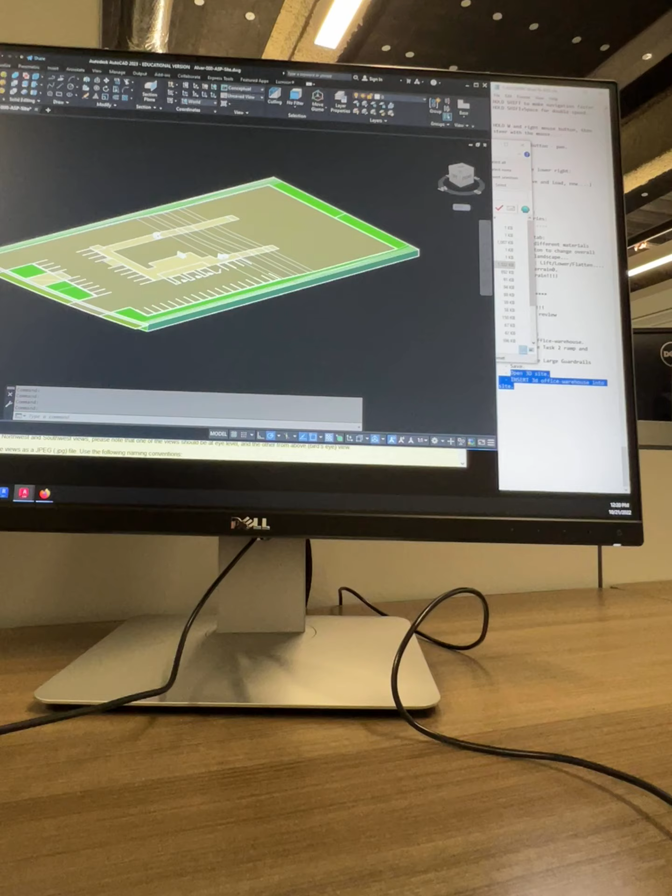You ready? Let's do this. Step one, I have a question.

For task 2, for the ramps, when we start doing the ramps, as I remember, you moved it like 45 back. Yes. But for yours now, you are showing we didn't do it 45. Is it showing that we did 45 or not? Watch out, the sides were 90, not 45. I mean, yes, I did 90, but for like, I moved it and 45.

Why would you move it in another 45? It's just, you inserted it. That's what we did first class. Careful.

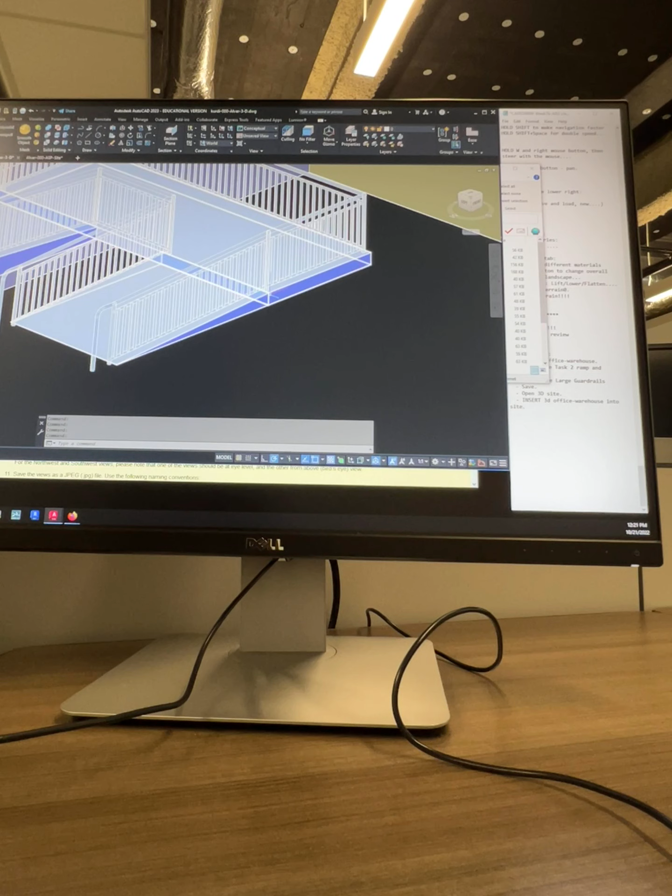Let me open it. Open with Acrobat Reader. Give it a second, I'll show you right now.

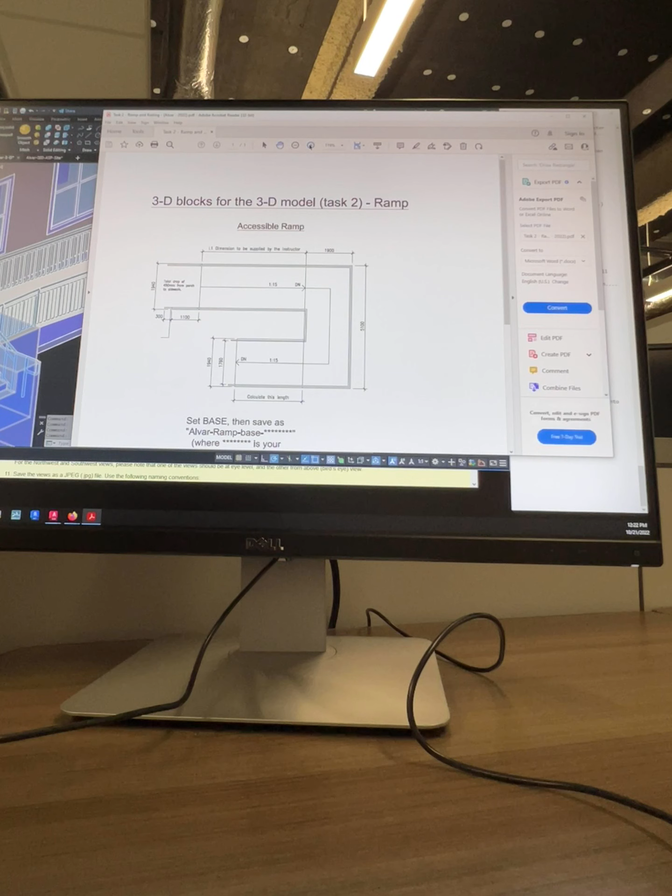So this was here, 90. It was mandatory, you must make it 90 because of the way they build the sloped ramp, right? So this here, from the edge of the concrete to the center of this railing is 90. This is 90, it says so right there. This number minus that number divided by 2. This minus that is 180, half of it is 90 millimeter there and 90 millimeter there.

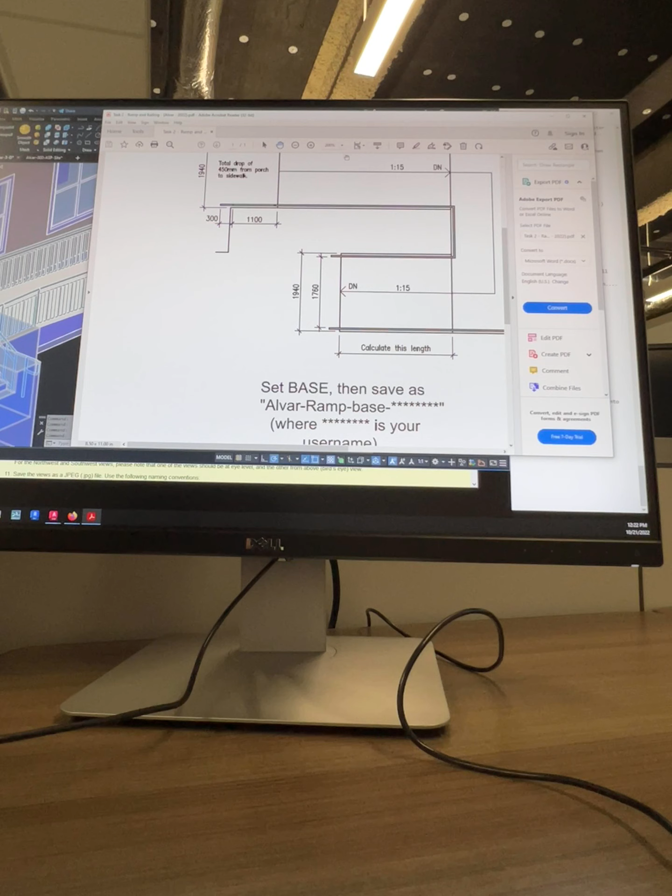All the other measurements we made 45. We made this one go forward 45 and back 45. But this one, we made it plus 90 longer and plus 90 longer. That's what we did. This one we made 90 back and 90 back from the edge. So the vertical ones were plus minus 90 because this had to be built like that. You have to, because there's a corner edge here that is not shown on the drawing.

If you go back and look at the Mississauga FADS or any of the other ones, right, you'll see this. Here it's Firefox, let's go and look for Mississauga FADS from it. Here it is, Mississauga FADS. There's another replica, we're there. You can open the HTML version or the PDF. I'm going to open the HTML version.

So here's the web version. And if you go down and look, right here, you can go down and find it. It's somewhere under railings, I missed it. So somewhere here, ramps, there it is. Ramps, and if you go down here and look at this, right? And you look at the ramp image, you need to have it away from the edge by 90 because of the way it's built, right? You can see right here, this middle one. Look at the middle one, right here, the section. So this goes up, across, and down, and you have to make it 75.

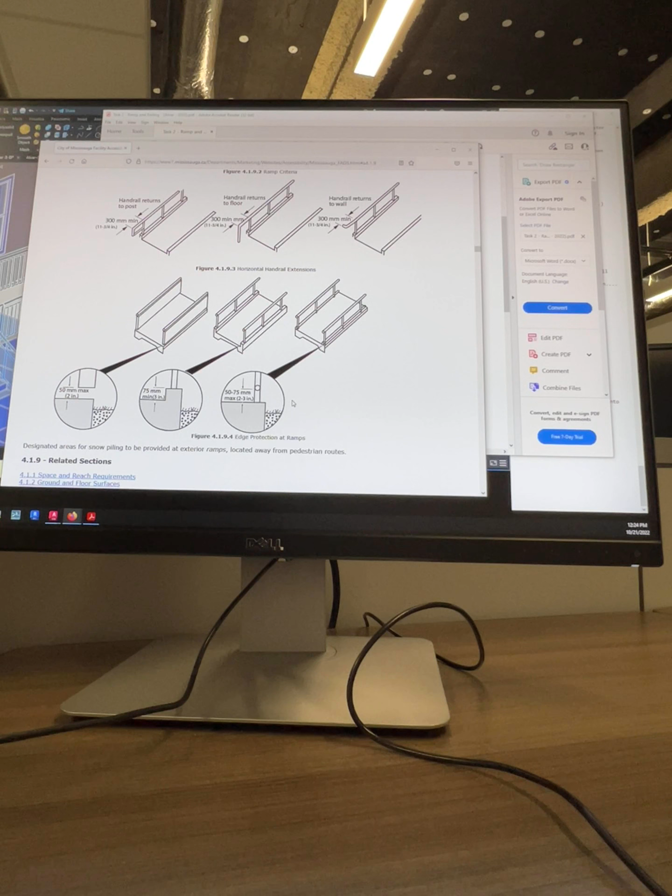But we didn't do this, we made it flat. If you're making it flat, then it can be between 50 and 75. We made it 60 up. But it has to go in from the edge 90 from that edge. That's basically how it works. For construction, you need to do that. And this is what we got.

If you did it differently, well, either you hand it in today since it's due, or you fix it and hand it in later. But basically, this is what we have. Okay, let's continue.

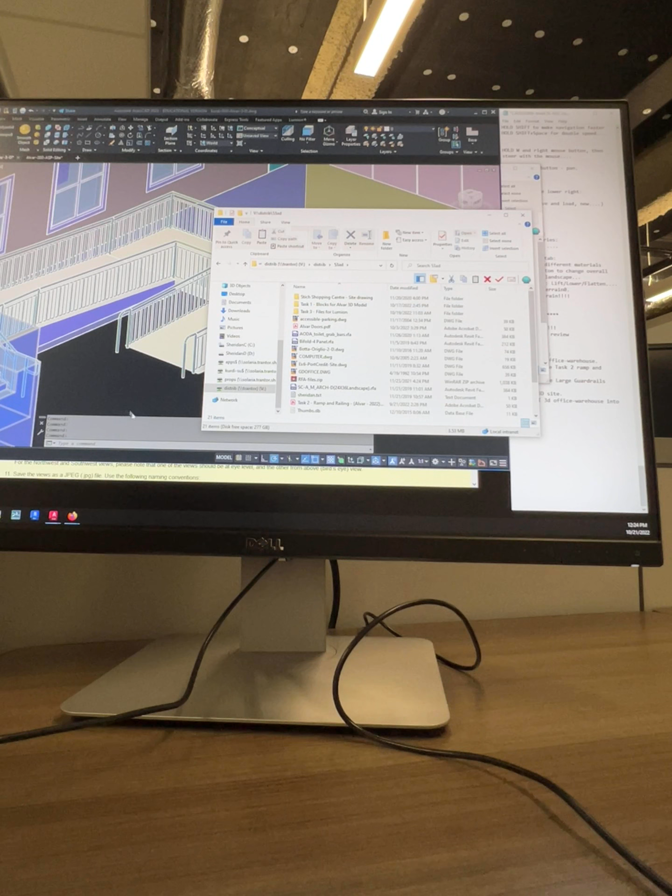I got the blocks, I got everything done here. It looks fantastic. And now let's insert this building into the site plan. So one final time, the final time ever, I'm going to save it. And I have some good news for you.

Stop. If you didn't finish your model, you're missing windows, you're missing these doors, or you're missing something, don't worry, continue working on it today in Lumion. You know why? You can actually update it in Lumion. So you go back, change the AutoCAD model, and update the Lumion version. Change the AutoCAD model again, update the Lumion version.

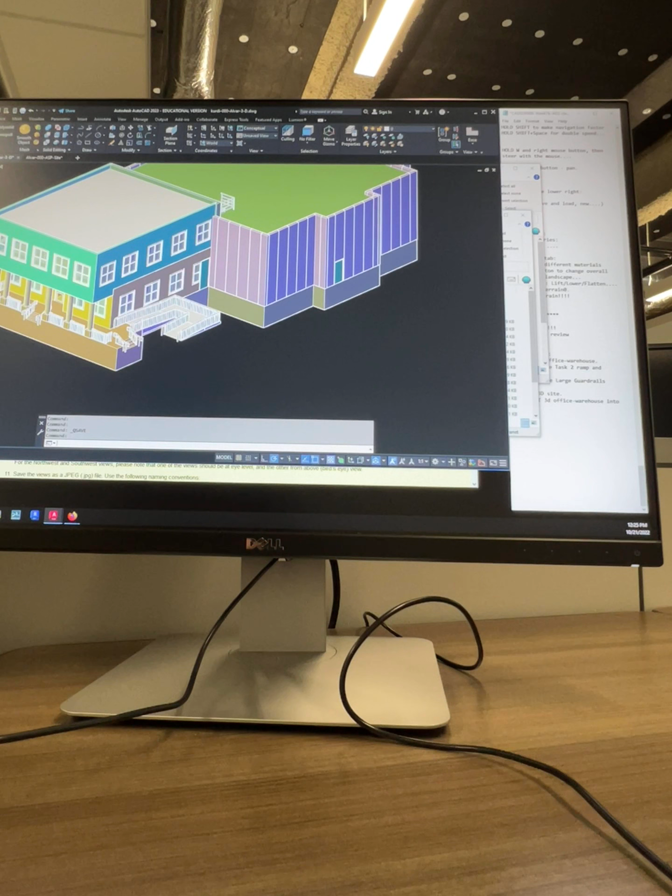They did this because they were tired of people saying, oh, I made a mistake but I'm not going to fix it because it's too much hassle to start all over again, right? So Lumion now has a way, they've been doing it for almost 8 years, to update the model easily. I'll show you. So even if you don't have a completed model, even if you don't have assignment 2's ramp done, doesn't matter, take the building and let's continue. Are you ready? I'll save it one final time and close it. I'm done with it, no more 3D model.

I'm going to insert it in here now. Watch, right here, let's insert the big building. You should do the same, even if it's not finished, please. Let's move on, let's continue working.

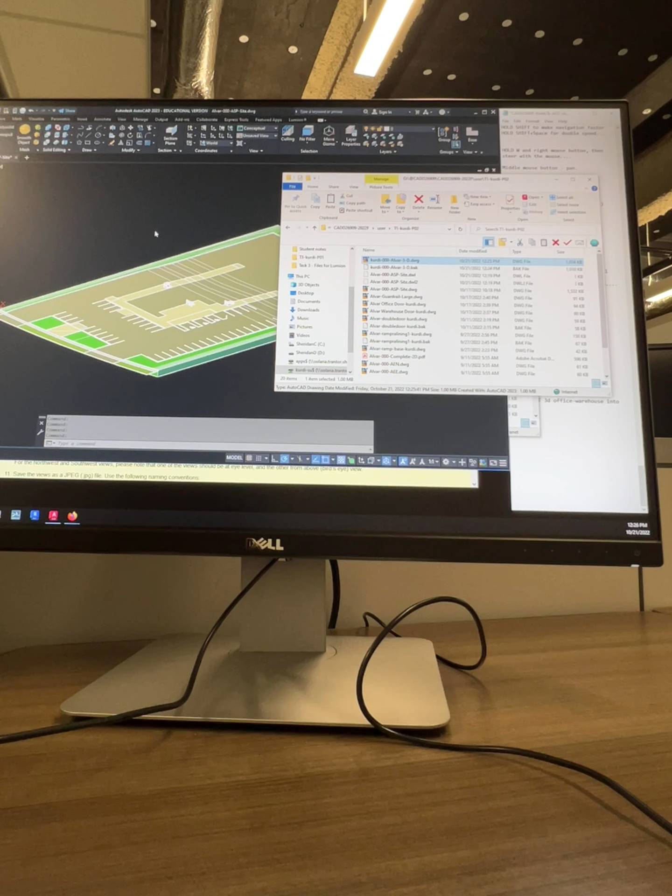So, user, assignment 1, PO2. Right here, there's my 3D building. Drag and drop, drop it in. Insert, it'll take a while, it's big. There, I got it. Drop it down in the back.

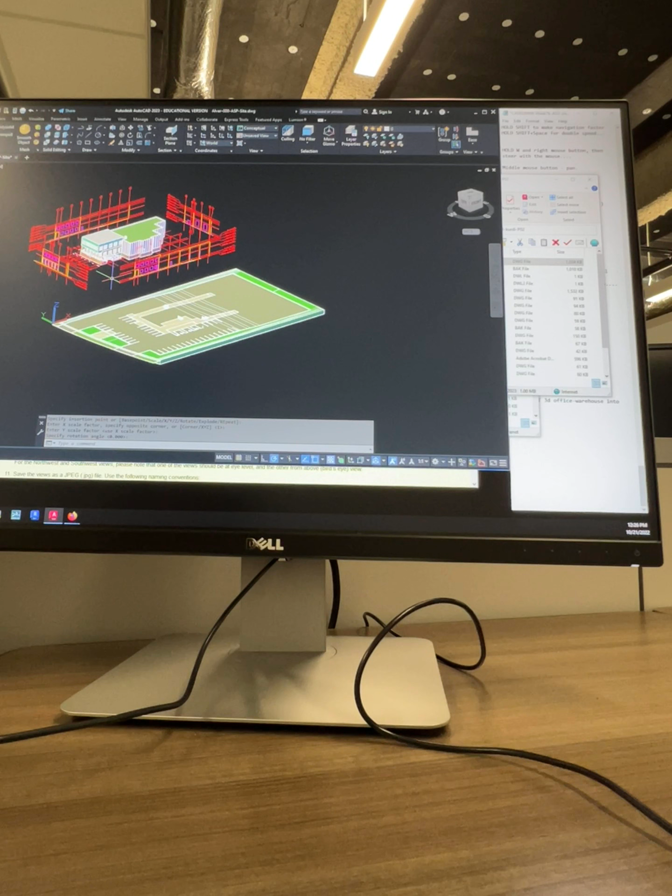Somewhere there, it looks beautiful with everything, all the extras and everything. Scale, enter, Y scale, enter, rotation, enter. And we got it inserted, right? We got the model. So please continue inserting it into your site even if it's not finished. You will have time this week, because it's reading week, to finish it if you don't have it completely done.

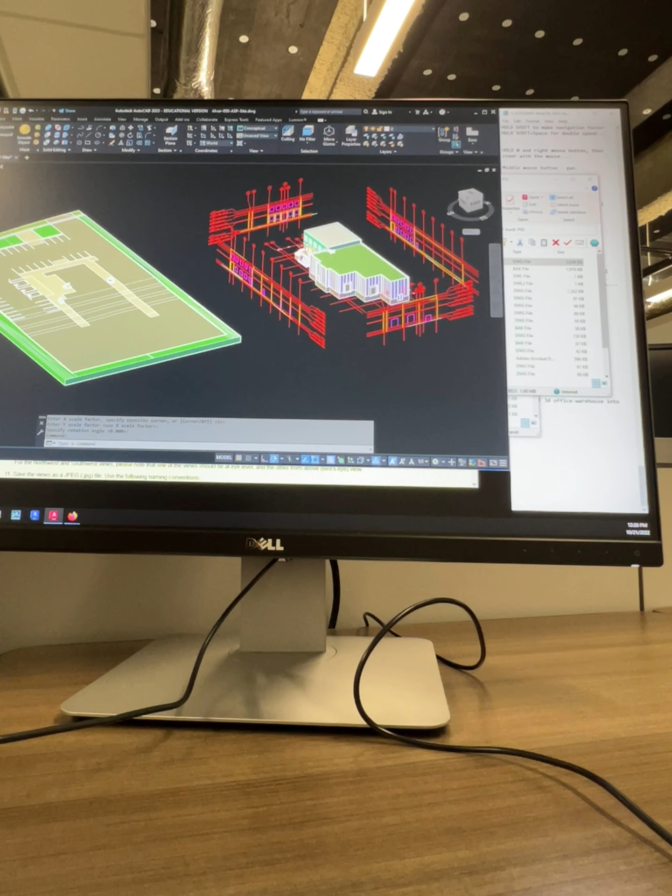Right, now I'm going to cheat a little bit. Watch, I'm going to change one thing. Don't do this, in fact I think you already have it. On some of your sites there's a mistake. We made a mistake when we were stretching them, because the outside measurements are the same for everybody, right?

So if you look, okay, I have to be careful, these machines are not as fast as the one in B432. So the width of this is the same for everybody. The edge, the curved edge, is the same for everybody, right? The back of it here is the same.

The only difference is the middle part. This middle part is all different. Why? Because everybody has a slightly different building. So we have to stretch and adjust and fix and so on. It took forever to do. We made 280 copies of it, or at least I did. I made 280 copies of this model.

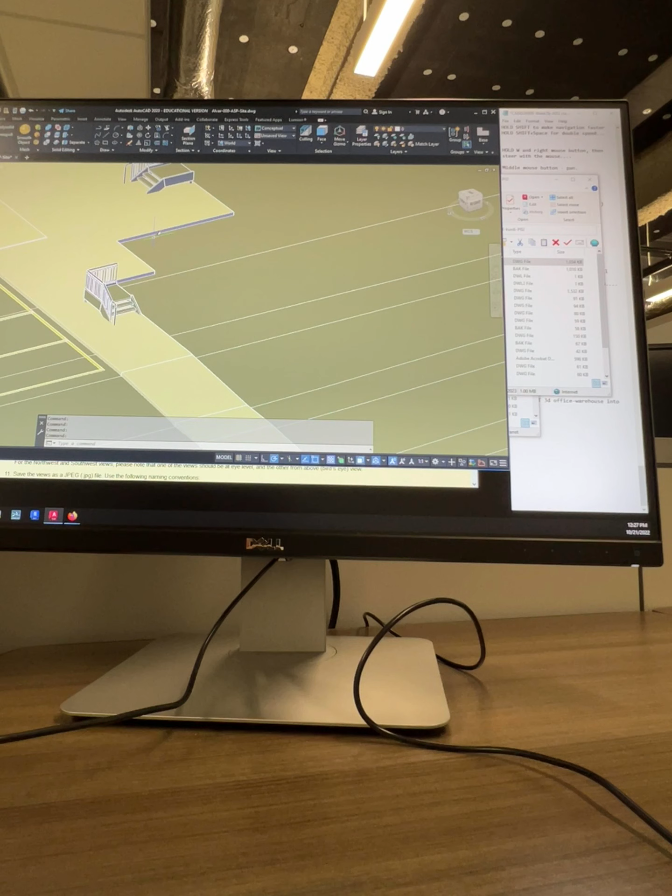And watch, I'm going to deliberately make a mistake now. Don't do this, just watch. I'm going to move this face back 300, like that. So deliberately I'm making a little mistake in the model.

Don't do that, I already have it done on many of your models. On many of the site plans I already did that. There's a mistake, so I made a mistake on some of the site plans. Guess what? After looking at it, I said, oh, that's perfect. Let's load in the model with a mistake, and then I'll show the class how to fix a model in Lumion.

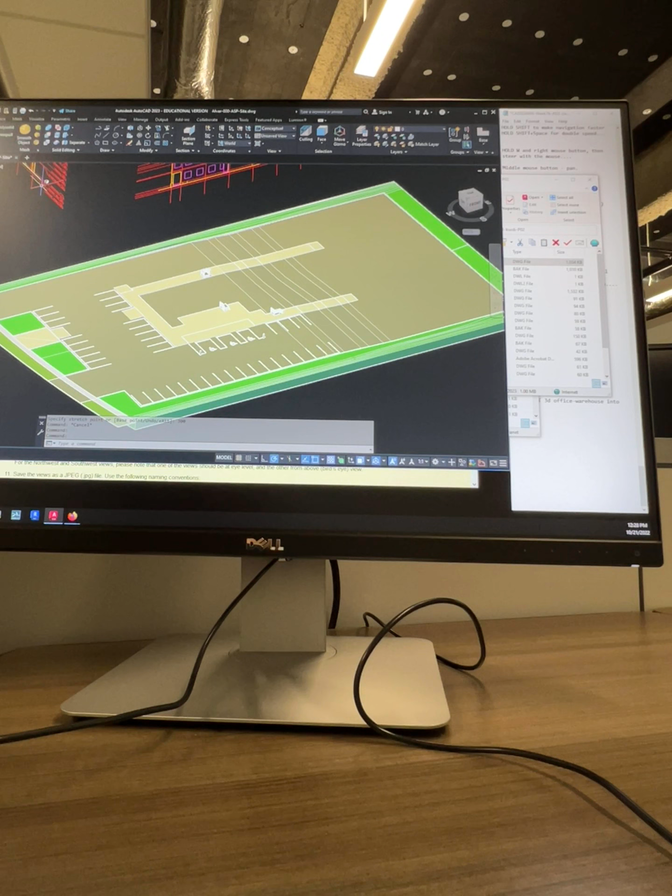Okay, so I was so happy that I made a mistake, because I can teach something else, teach something new. So watch the screen. I got it done, and most of you have this mistake. There's a little tiny sidewalk piece missing here in the corner. You will see it in a minute.

Now, how do you put the building in? Easy. One, can you please freeze and turn off all the extras? Layers, let's do it. So go to layers. Take the extra, no need to freeze them one by one. No, click here, freeze the whole extra group, all of it. Visibility, frozen. They should disappear in a minute.

They're gone. Now do it again. Visibility, turn them off. So I'm freezing them and turning all the extras off, just to make sure 100% they won't be visible. I don't want them ever visible. So go to Xref and just click on the Xref category and just freeze from there, easily.

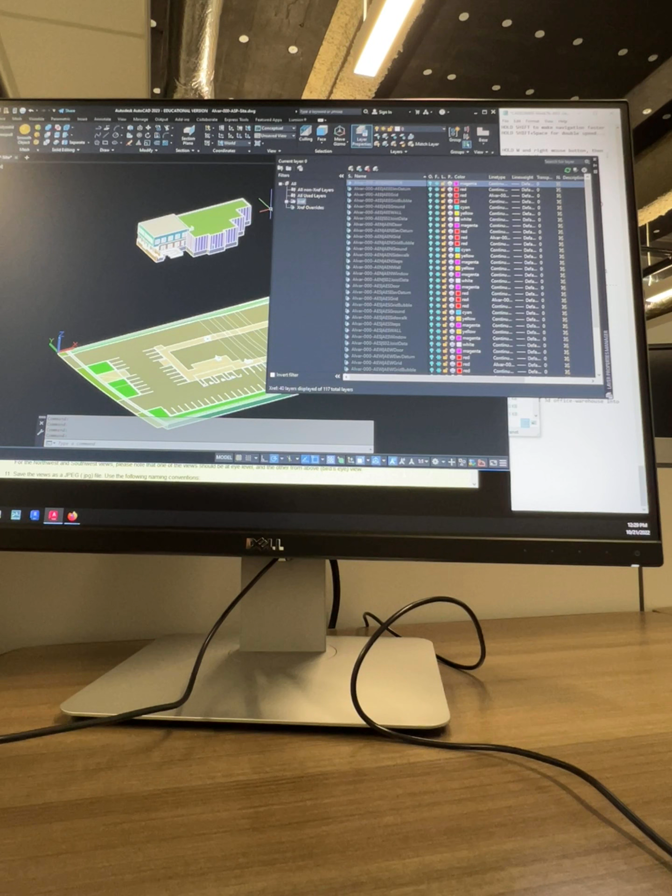All the extras in one shot, right? Visibility frozen and visibility off, like this. The Xref group, this one, visibility off and frozen. The rest of the model is just fine. Look at it, it looks beautiful. Now, let's move it in place.

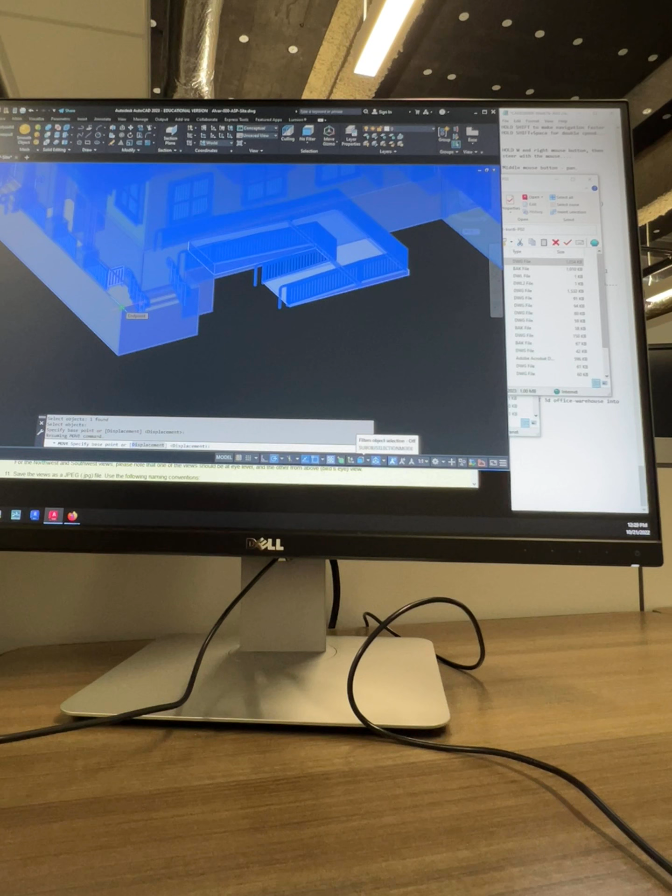And we got a problem, watch the screen. I'm gonna move it now, watch, move. Move this big block, enter, from the front, here, the front corner of the walkway, there, the front corner, there where I'm pointing, see it? Click, move it from there, and we're gonna put it on the site plan, at this corner here, the front corner of the front, like that, click.

That's step number one. So move it in, put it at that corner, that one here, the bottom corner right there, at the corner of the sidewalk, right? I don't want the explorer, no need.

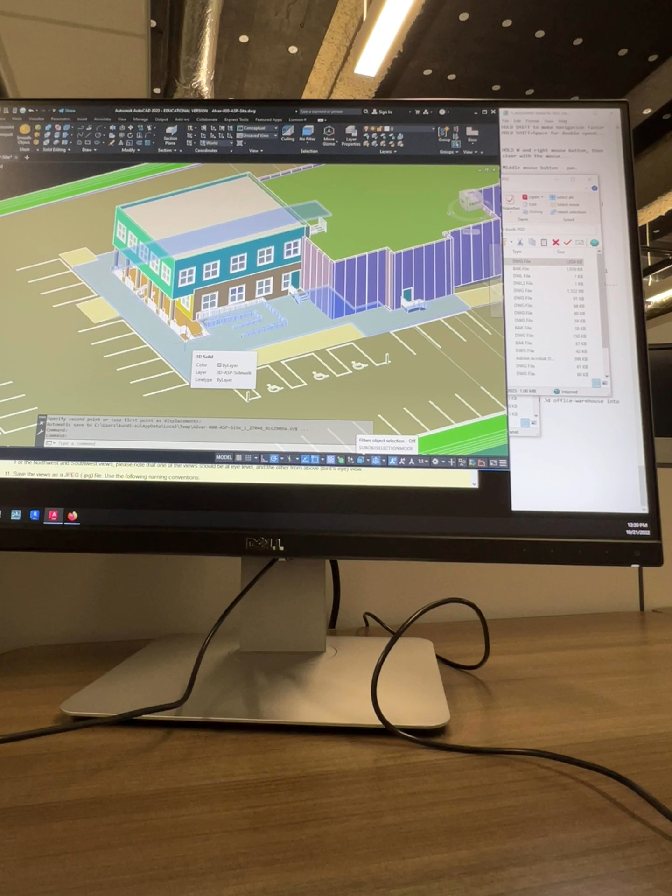Okay, can you turn them off by hand? Like this, go to layers, and go to all layers, and you'll see the xrefs in gray. It should show up in gray, like this. Select them and freeze all of them. Click on the first one, shift to the last one, and then freeze them.

Okay, sorry. That's weird. If you don't have an xref, that's odd. You should have an xref. There should be there an xref, always.

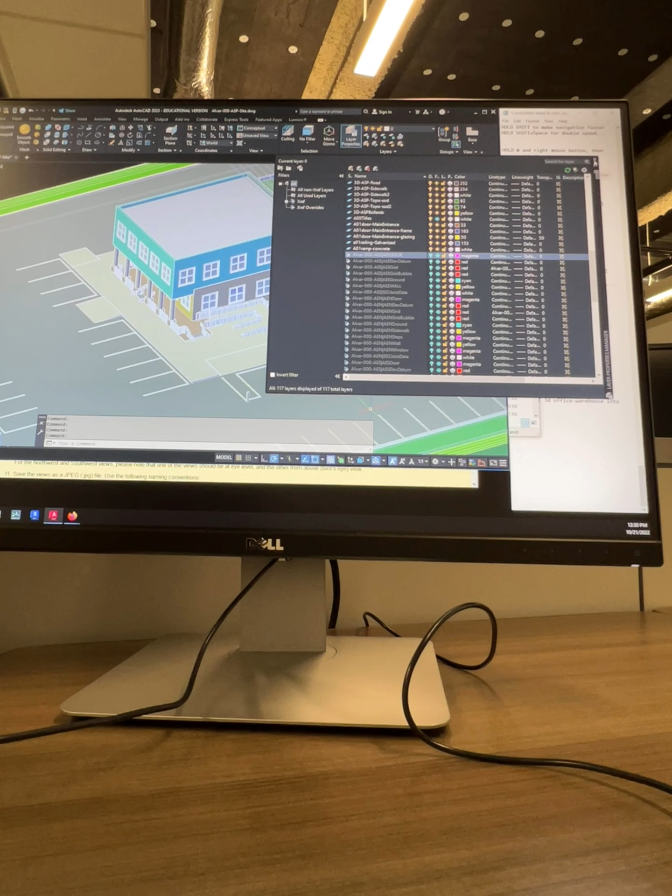Okay, let's continue then. Did you put the building here in front, right there? Well, the location is correct, but the height is wrong. Check it out. You see how the railing's going underneath the ground? That's not good, right? So we moved it, we put it in place, but the height is wrong.

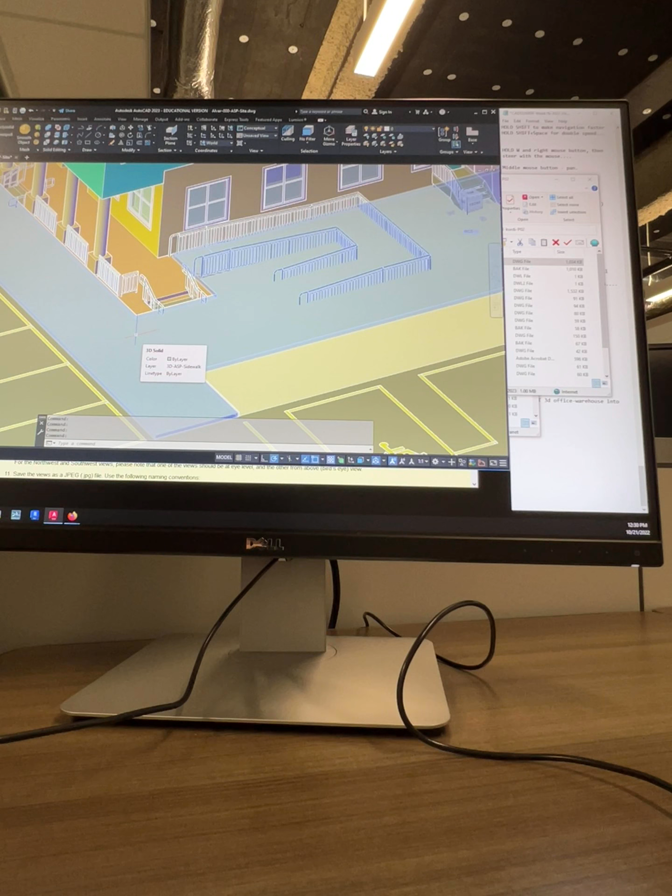So grab the corner there, put it here, and then move the building up 450. Everybody, grab the building, move it up in the air 450 like this. Move the building up, straight up plus Z, 450.

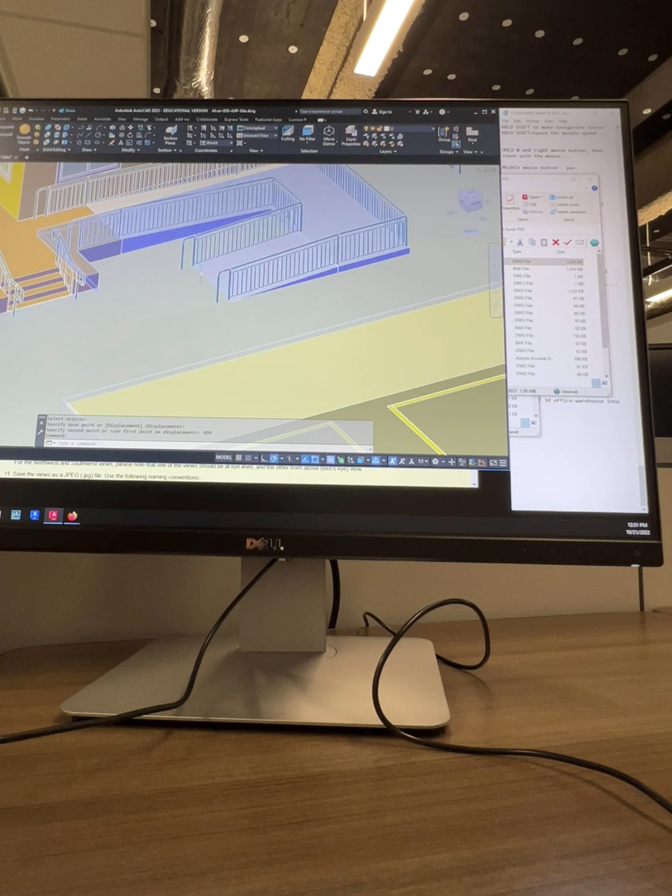If you zoom in on it, it looks perfect. You can see the ramp stopping exactly there at the edge. You can see the stairs. The first step is flush with the sidewalk. Perfect, I love this. So we got it done. This is what we wanted. The building looks perfect, right?

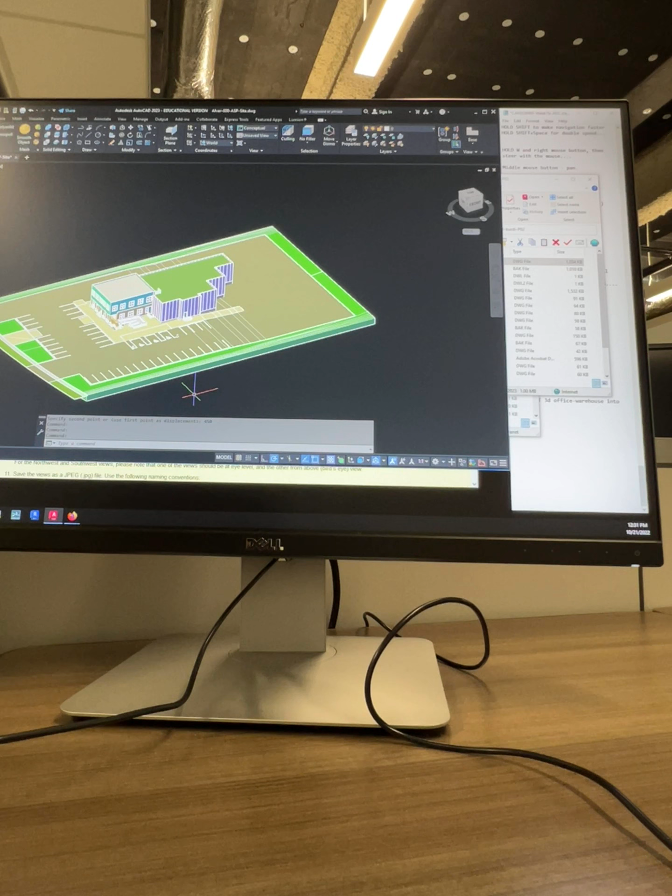Anything else you have to fix? Yes, question: the ramp on the exit door for the office is on the window, like touching the window. That's okay, that's okay, it's a good question. The door and the office are overlapping. The door and the window and the corner are overlapping. Not really, they're not really overlapping.

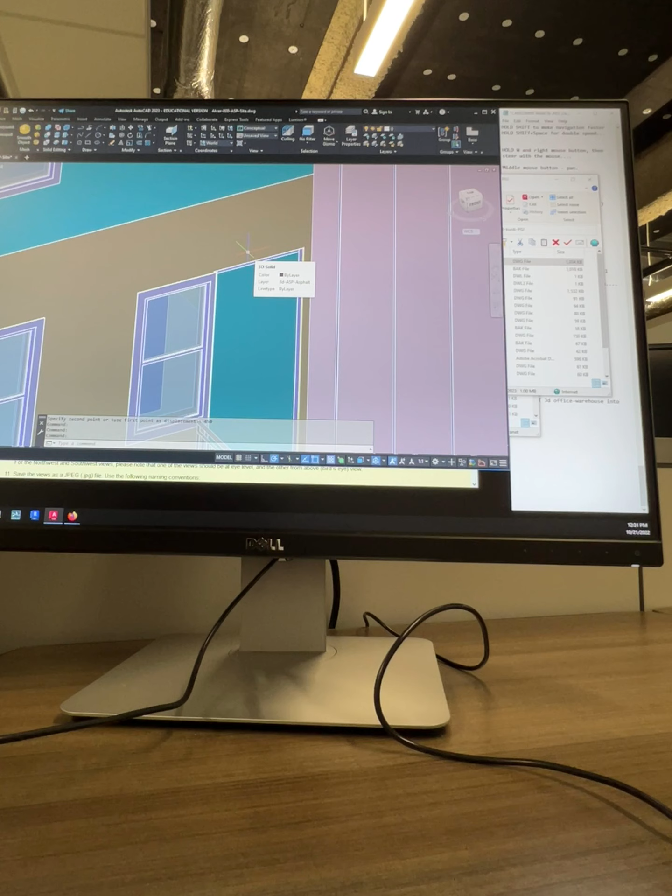If you look at it carefully, look at it, only the frame is overlapping. So you put the window in, and then when you add the wooden frame around, or a plastic frame around it, the plastic frame overlaps with the metal frame. But the openings don't overlap. No, there's no problem with that. So it's a little bit off, but it's tight. There's nothing else I could have done. We have to fit it in that way. There's no other way.

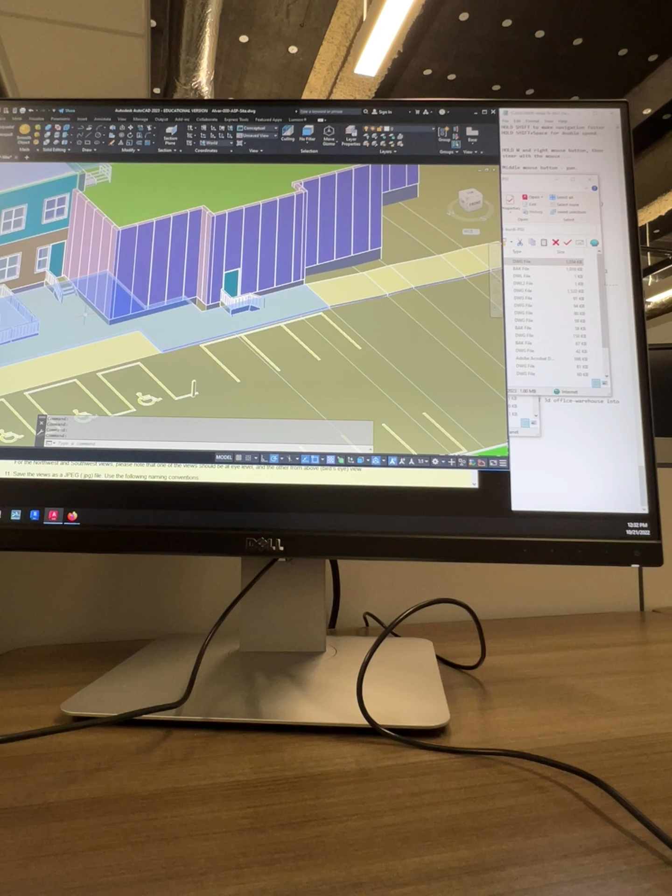Do me a favor, everybody, check your stairs. Watch. Look at the screen, everybody, for a minute. Here's the problem. You see the steps here?

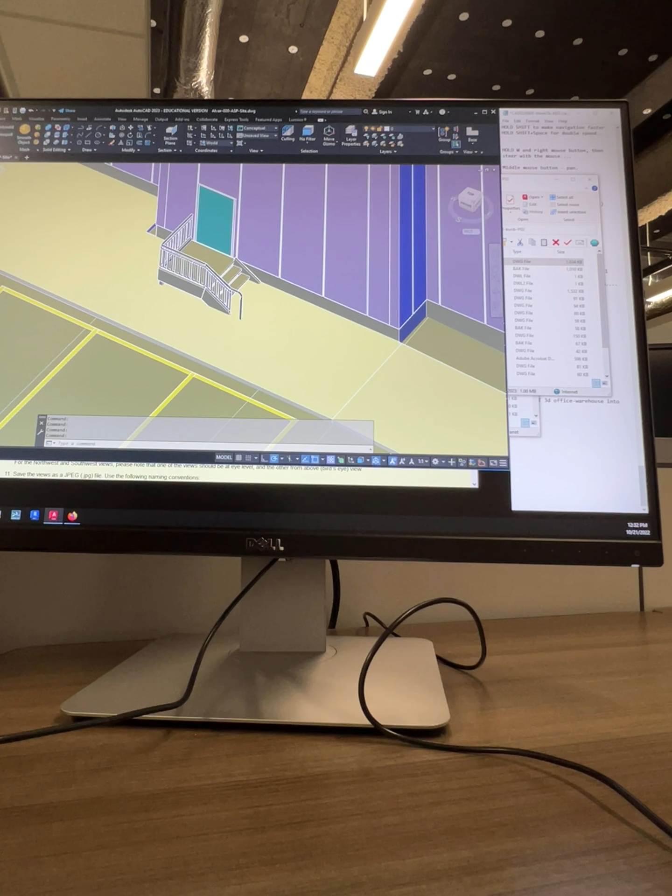Mine is perfect, I was lucky. Look at this, I rotated, orbited. Look, look, look, it's absolutely perfect. The door and the frame is exactly in the middle between this point and that point there. That's great, look at it. It's almost perfectly in the middle.

Remember when we made the door wider? If you stretch this space over 205 millimeters, whatever it was, that unfortunately won't work. You have to move the railing to match. So the railing is loose. You see the railing here? It's loose, you can move it.

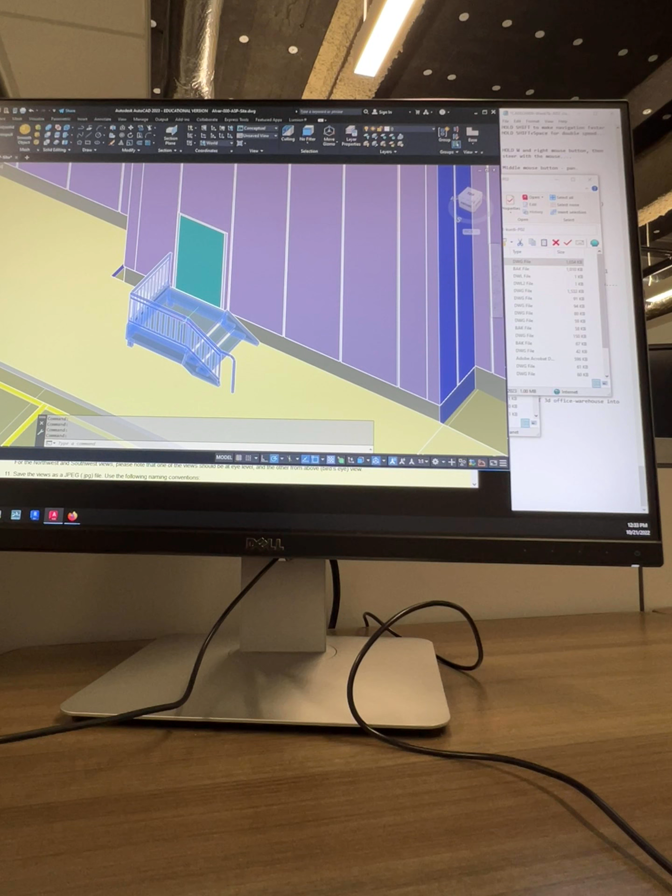And I have a problem here. The door here fits, but the back one doesn't. Look, look, look, the back one here, I stretch it the wrong side. Look at it, that sucks. This is a problem. The railing is going to touch the frame or go into the frame. I don't want that, so guess what I'm going to do? I'm going to move it.

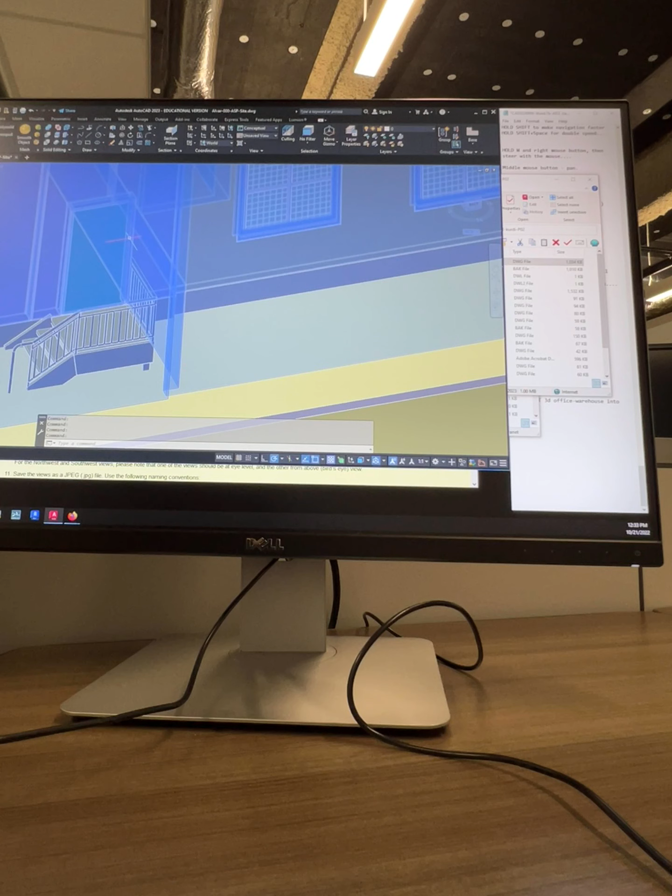This happened because we stretched the door bigger. When we moved the door and stretched, I moved this space over, I think 180 or 190. Unfortunately, I screwed up the center of the door. It doesn't fit, you see? It doesn't fit now in here.

So I'm going to have to move my stairs. Look, the stairs are loose. I'm just going to move it over 100. Move this back, eventually 100, 4 inches. And it looks good, now the door looks centered in the opening at the bottom.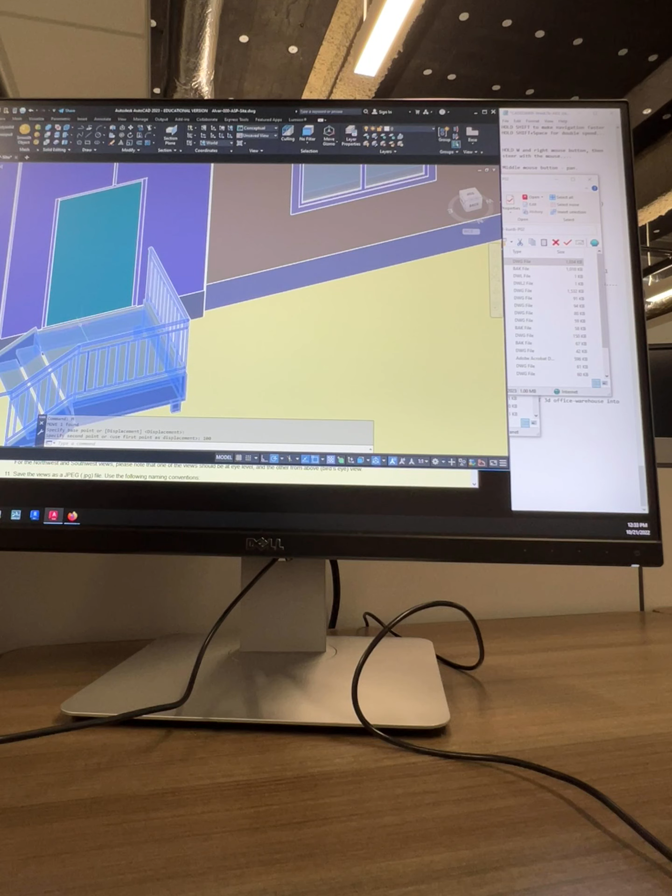So you might have to fix the stairs, eh? Zoom in, check them. Does the stair or the door opening look good? If they don't look good to you, fix it.

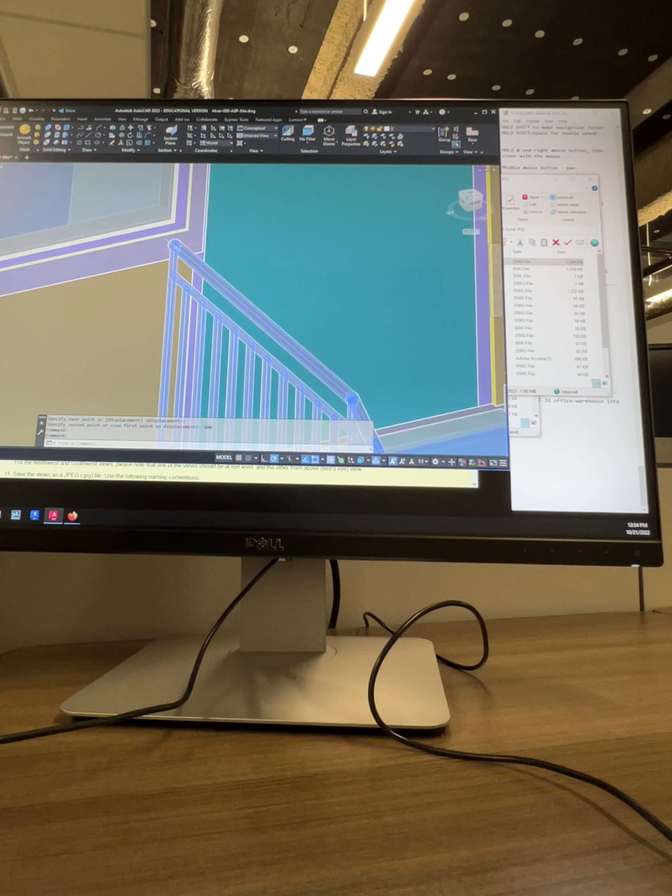Everything else looks fine, I'm happy with the model. Here on the other side, this stops just before the frame. There's not much I can do about it. This is so tight, there's no place. This is touching the precast actually, so you can't move it anywhere. You can't, even if you wanted to, you can't move that door.

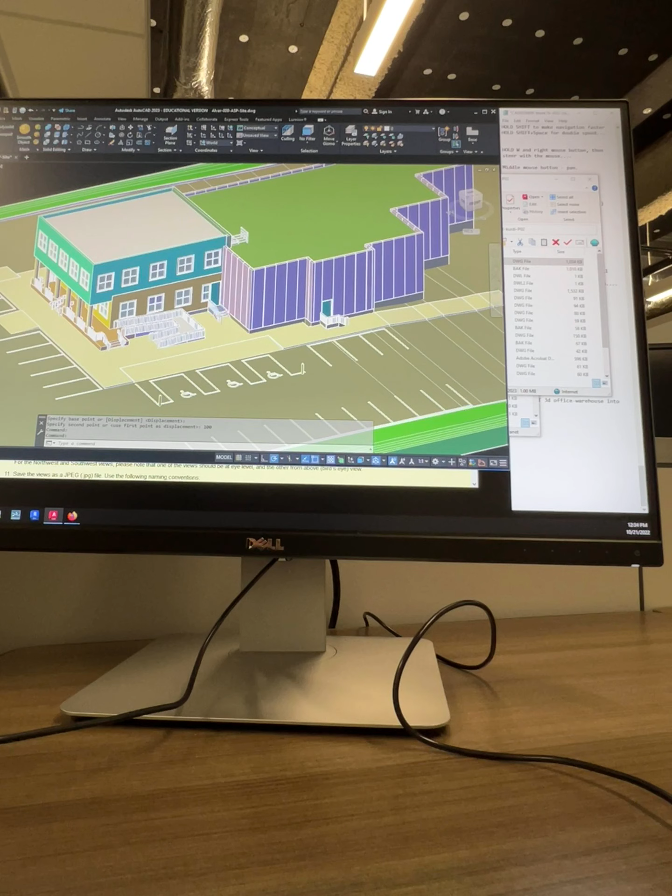And the frame does overlap. The wood frame does overlap with the door frame. Again, there's not much we can do about it. I would leave it the way it is. And look, we have a beautiful site.

Save it, one final time. Save it. Your model is ready for Lumion, right? Save it.

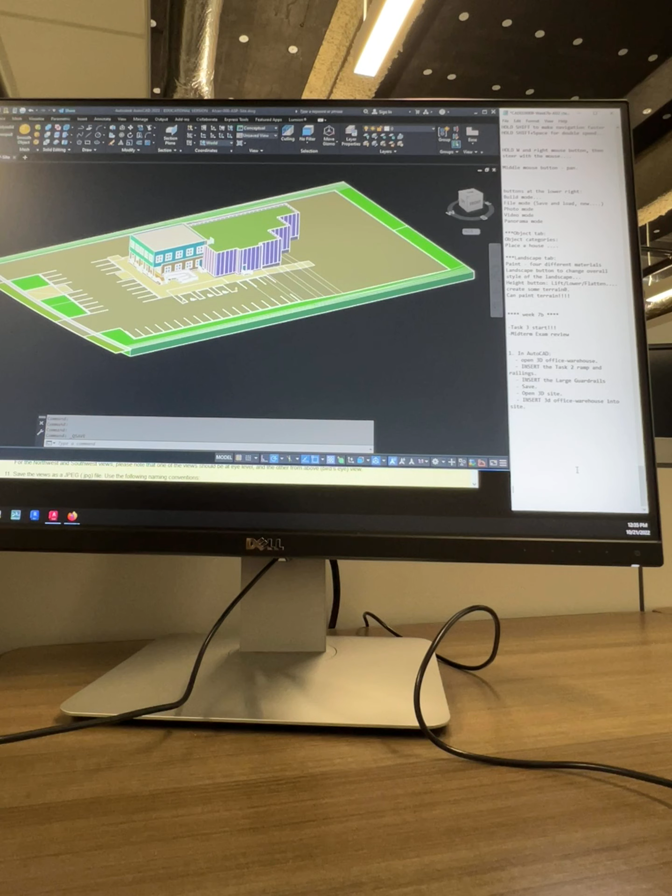Okay, we watch the screen. Watch, I'm going to zoom in. There's one...